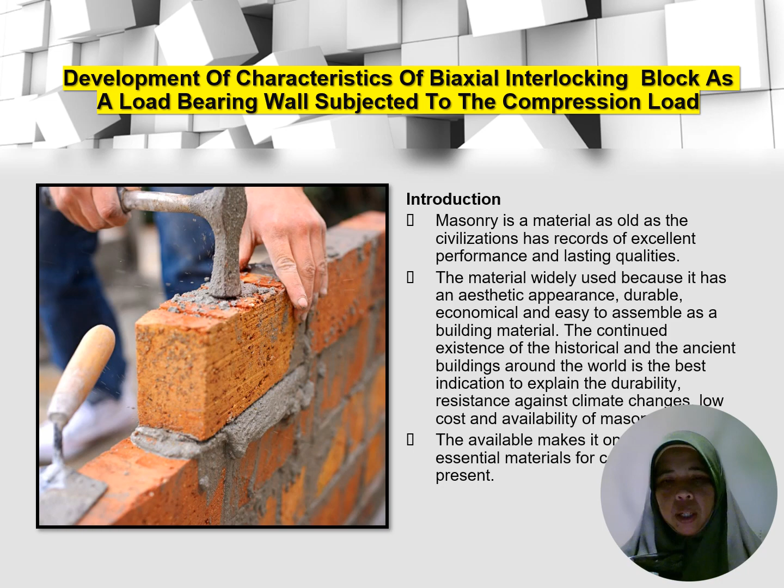Biaxial interlocking block, or BIB, is a new masonry unit introduced to the industry. This masonry unit consists of multiple grooves and tongues as a locking system in the X and Y direction. The interlocking blocks give various advantages such as reduced self-weight, reduced design load, simple handling, simplification as building components, increased compressive power, reduced workforce, increased construction quality and quantity, and reduced project construction time.

Furthermore, the interlocking block units can be applied as a load-bearing wall by a reinforced method, putting in grout material and reinforcement. This study focuses on biaxial interlocking block, or BIB, properties and behavior as a walling unit with the interlocking mechanism through the grooves and tongue under uniaxial compression load.

The main features that masonry walls must offer are compression, tensile, flexural, and shear strength. Generally, masonry is strong in compression but weak in tension. The compressive behavior of masonry due to vertical load is of crucial importance for design and safety, and has been studied extensively over the years.

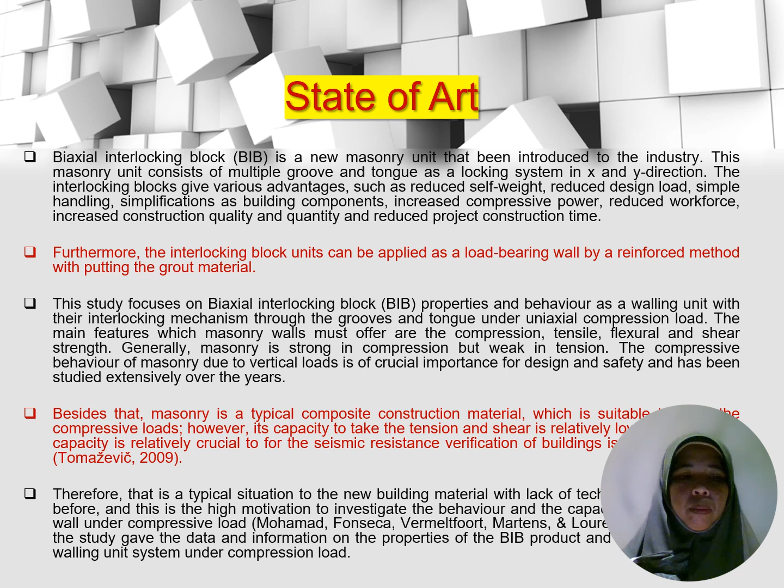So why do we have to carry out this study? As we know, cement sand brick is the most preferable masonry unit in masonry construction, due to its advantages such as low cost material, light weight and simple construction, etc. However, there are several weaknesses of brickwork masonry such as labor, time consumption, and the quality of the project.

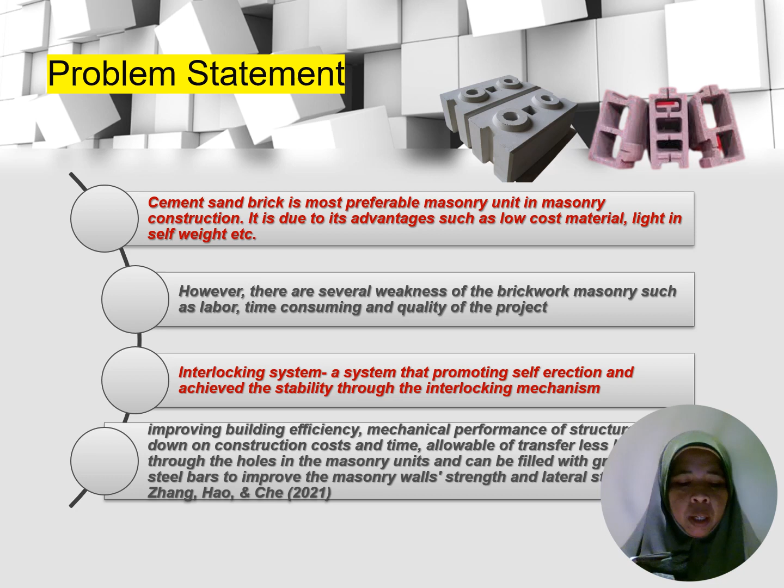So the interlocking system, as we know, is a system that promotes self erection and achieves stability through the interlocking mechanism. By using the interlocking system, it will improve building efficiency and mechanical performance of the structure, cut down construction cost and time, allow the wall to transfer less heat through the holes in the masonry units, and can be filled with grout and steel bar to improve the masonry wall strength and lateral stability. Shi, Zhang, Hao and Che 2021.

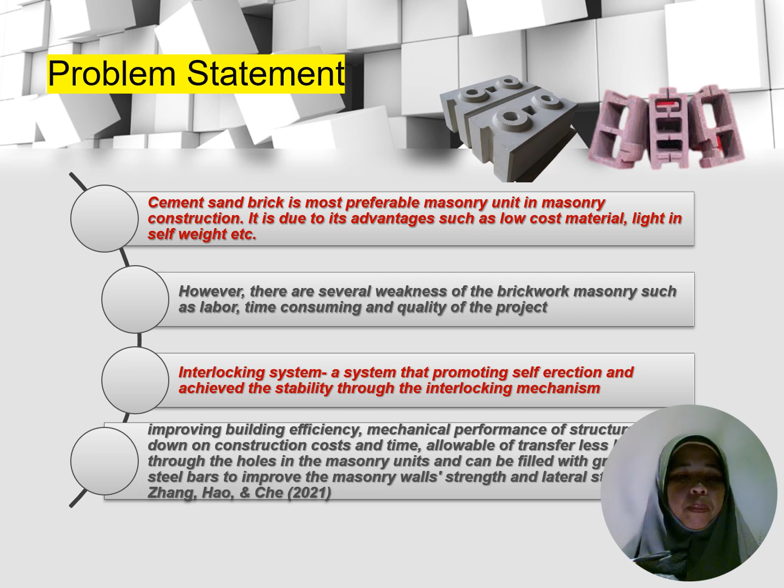So the objective of this research is devoted to investigating the properties and behavior of BIB subjected to compression load in masonry construction, to ensure that BIB is appropriate following the British European Standard BS EN 1996-1-2:2005 for masonry structures. The BIB item needs to be studied inside and out.

The objectives to achieve these aims are: first, to develop properties of the BIB single unit; second, to evaluate and analyze the mechanical properties and behavior of the wall system; to assess correlation coefficient and develop mechanical properties prediction equations; fourth, to perform and conduct a parametric study using the established model and evaluate the walling properties; and last, to calculate and develop capacity reduction factor in determining the design resistance value for the masonry wall.

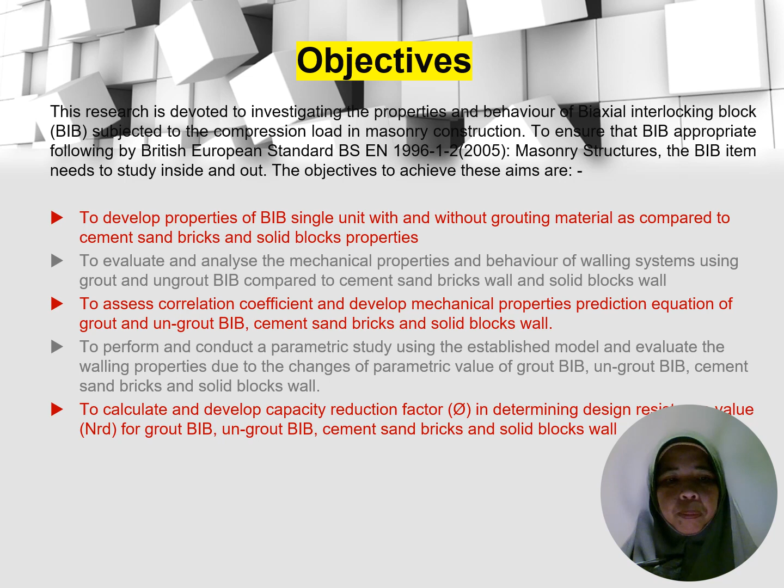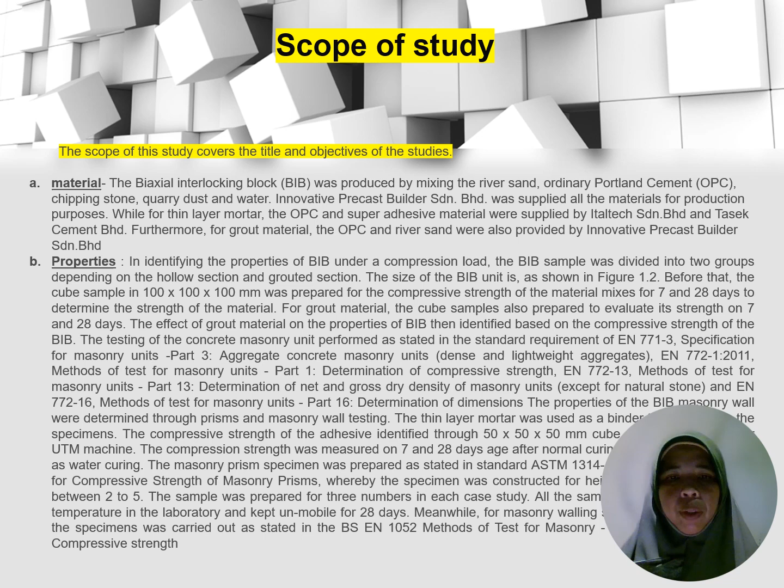So the scope of study consists of material and the properties of the masonry unit, and also we covered finite element modeling, which was performed to produce an established model for validating the laboratory work with the software Abaqus 6.14.

And for this FEM analysis, the simplified micromodeling was chosen based on previous studies that this method is suitable for the new masonry material, purposely for the interlocking concept.

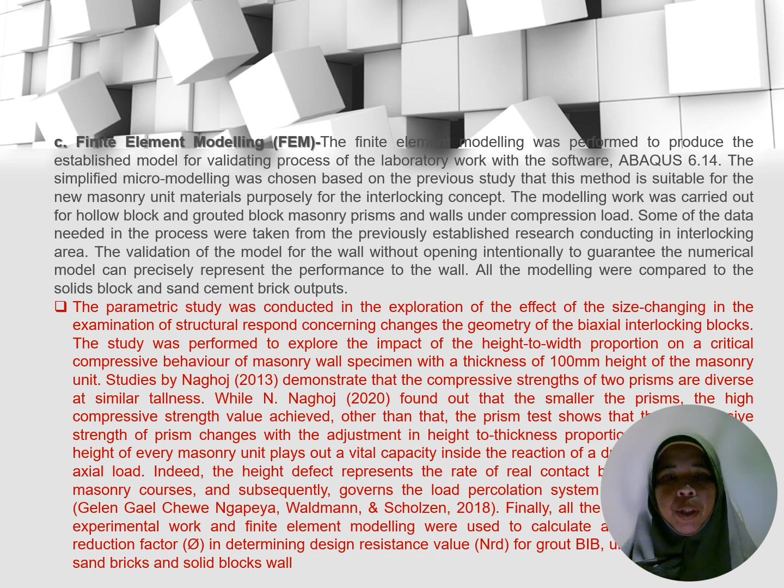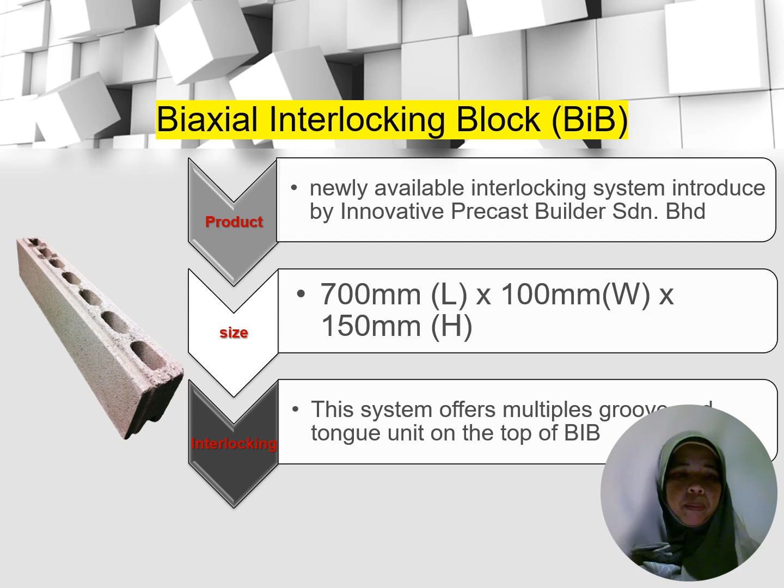For the literature review, we are purposely looking at the interlocking system itself. There are several previous studies on the interlocking system, starting with Al-Fakih et al. 2020, which is a system constructed without mortar, basically known as dry-stack or interlocking masonry wall.

For Foraboschi 2019, a system that may eliminate the use of mortar and may prevent the assembly of blocks from separation during construction. Sturm, Ramos, Lourenço 2015, the mechanism allows the blocks to lock themselves during the erection of the walls by eliminating the use of mortar joint.

So basically, based on these three explanations on the interlocking system and the rest, we can conclude that an interlocking system means that the masonry unit itself can lock themselves during erection by eliminating the use of mortar as a binder.

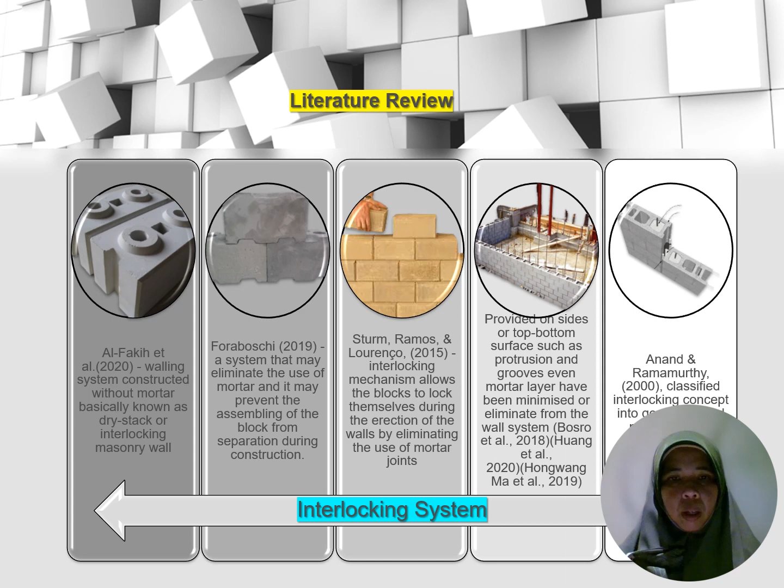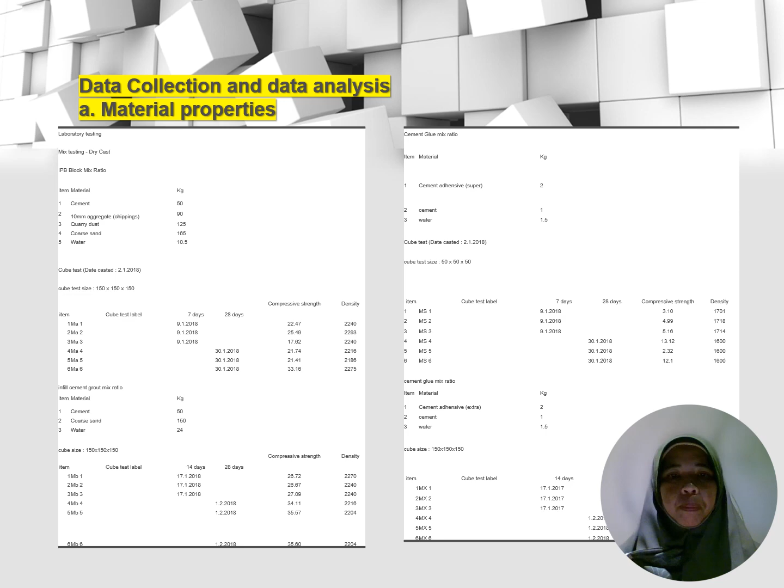Next is the compressive strength test of the walling system, and this is an example of the graph that has been plotted for the series of walling systems that have been tested.

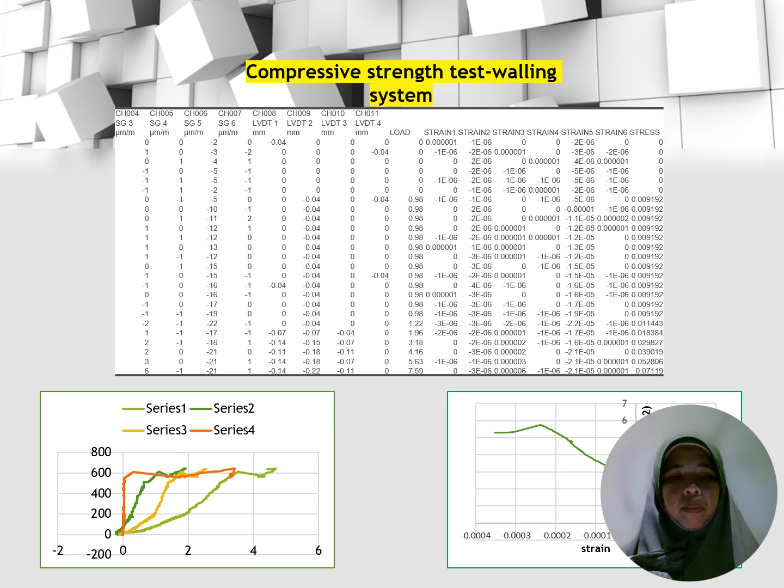This is the data for the flexural strength test. This is an example for the BIB walling system, and this is for cement sand brick.

And actually we also carry out a test on the solid BIB block to make a comparison.

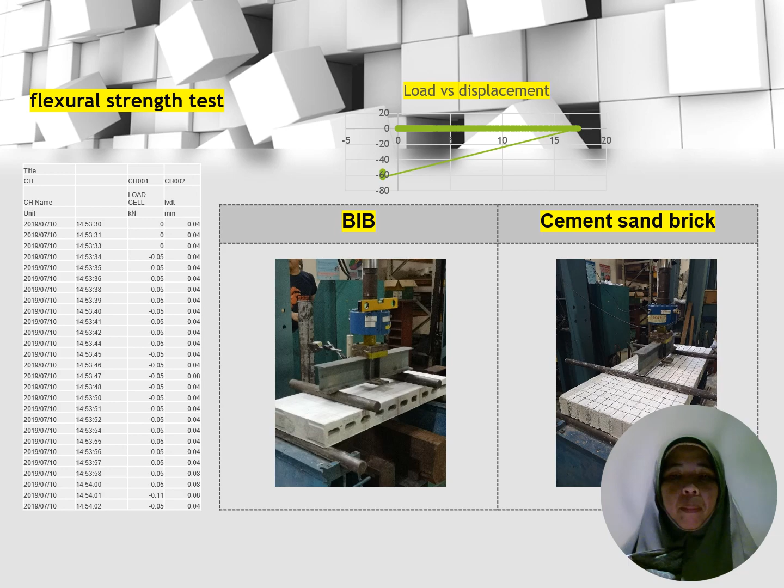For finite element analysis, we will use Abaqus 6.14 as the software with the use of the concrete damage plasticity model. This model has been chosen due to its ability to represent the mechanical behavior of block and mortar.

According to Kmiecik and Kaminski 2011, this model is an adaptation of the Drucker-Prager model, also used to represent the mechanical behavior of brittle materials, and as we know, our material is quite brittle.

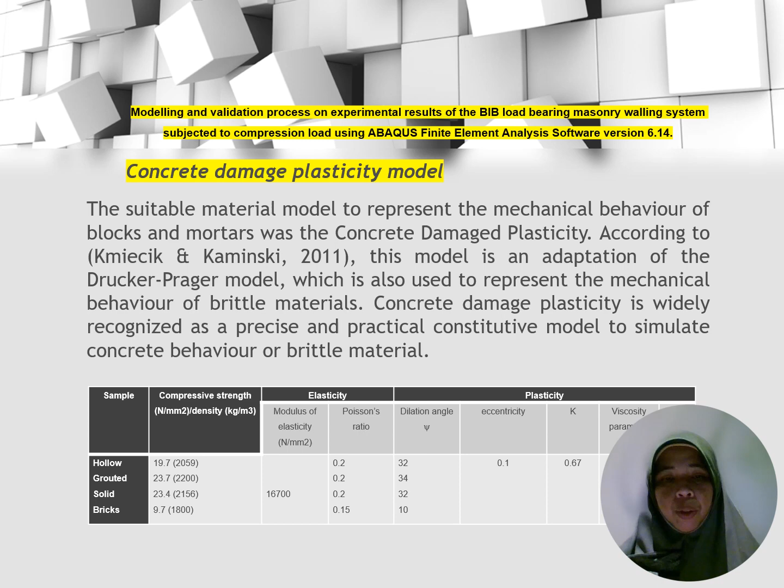This is the parameter that we will use in our analysis, and this is the explanation of the concrete damage plasticity model, which is for tensile stress and this is for compressive stress.

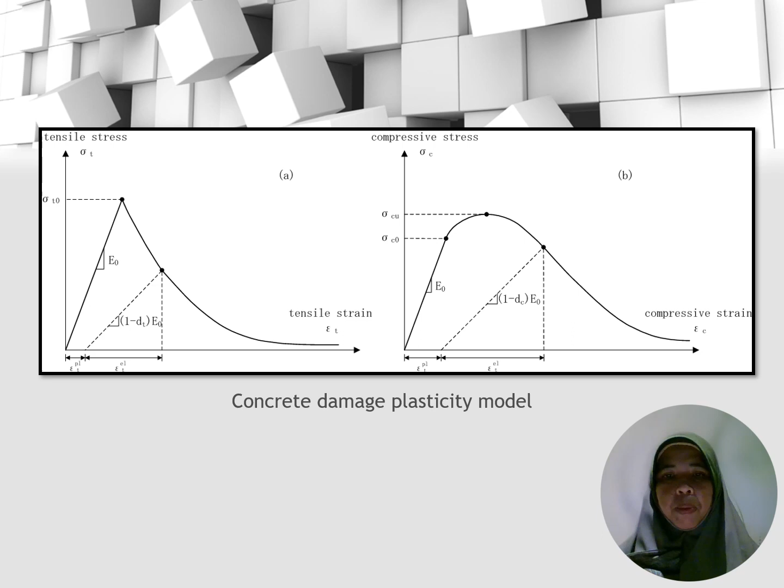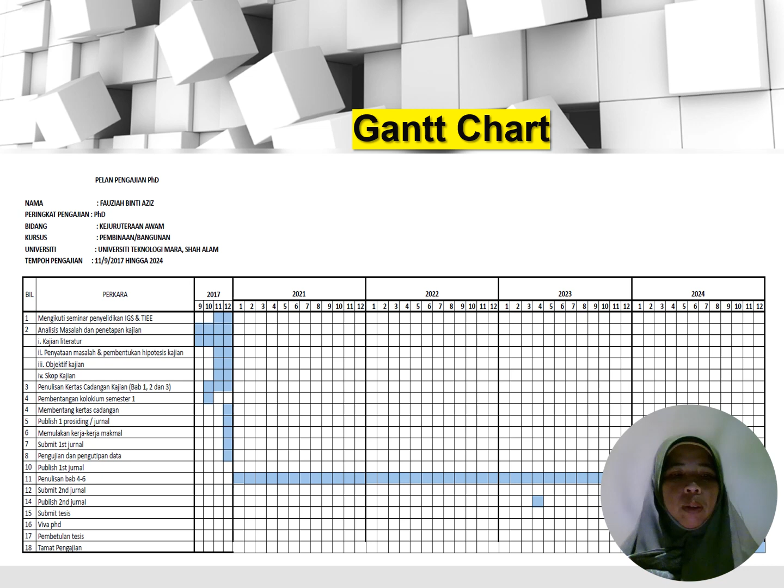And there are 4 publications during my study.

And for status of thesis writing, actually I completed chapter 1 and am already discussing with my supervisor the second draft of chapter 2 and chapter 3.

And for chapter 4, objective 1 and objective 2 were completed, objective 3 and 4 are about 50% progress, and objective 5 is 10%.

However, chapter 5 is not available because I have not started writing the conclusion yet, as I'm still struggling to finish chapter 4.

Planning for next semester, I will try to perform parametric analysis on modeling and produce a research paper related to it, and hopefully produce a complete thesis writing on chapter 4 and 5, and by the end of the year be ready to submit my thesis for Viva Voce.